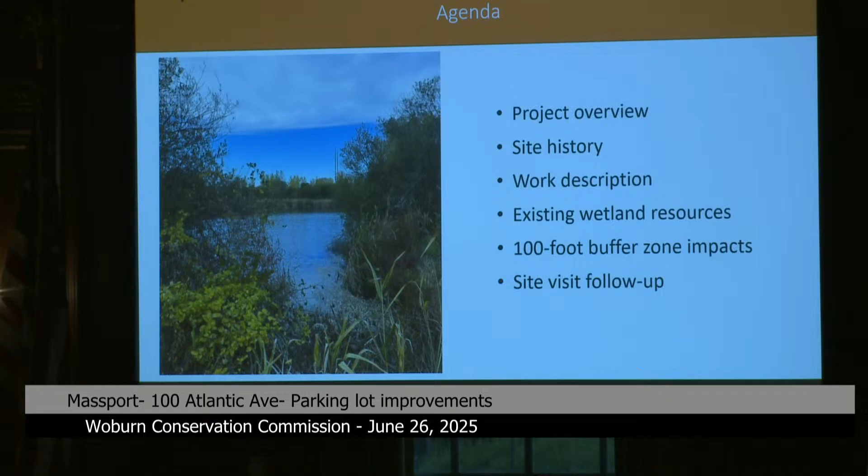Hi everyone, my name is Carly Barron. I'll give you a quick project overview, talk a little bit about the history of the site, discuss the existing wetland resources on site, the proposed 100-foot buffer zone impacts, and then we'll jump into a follow-up from our site visit last week, because I know we came out of it with some questions and requests, so we'll try to cover all of those things.

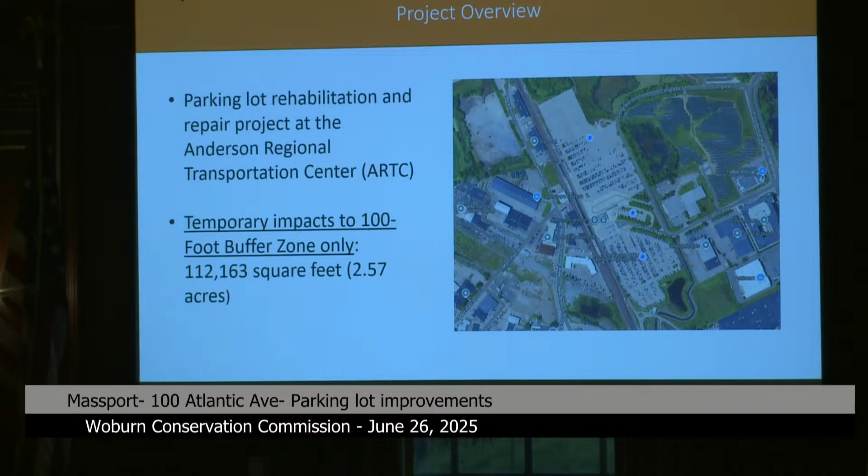So like Mary said, this is a parking lot rehabilitation and repair project at Anderson Regional Transportation Center, or the ARTC, and it is strictly temporary impacts in the 100-foot buffer zone. What I'd like to note, and I do have some hard copies here, this buffer zone impact number is different than what was included on our original application. I sent the commission an updated plan; the design hasn't changed at all, we just added a 100-foot buffer to a feature that didn't have it before, and our impacts went up just a little bit. We're looking at 2.57 acres of impact to the 100-foot buffer.

I'm sure all of you are familiar with this site, but the ARTC is built on the Industri-Plex Superfund site, which was a former chemical and glue manufacturing facility. The site was cleaned and capped with an impermeable layer to seal hazardous waste and prevent further pollution. The ARTC was built on the site in 2001 as a joint venture between Massport, the MBTA, and MassDOT. As Mary touched on, the ARTC has an agreement with the EPA to maintain this site, so this project is just part of the ARTC fulfilling that obligation.

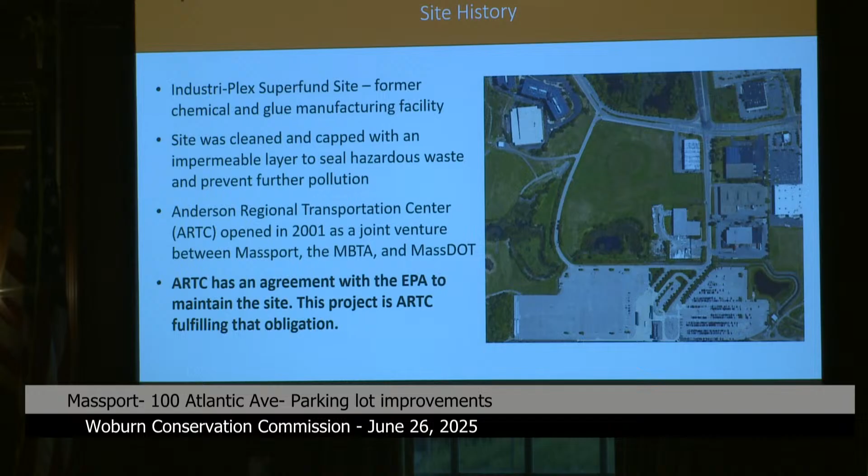To touch on the actual work proposed, we have pavement repair, so a mix of mill and overlay and full depth pavement replacement. Some drainage improvements, including replacing 2 manholes, only one of which is in the buffer zone, and replacing 4 catch basins, none of which fall in the buffer zone. And then repairing 16 catch basins - cleaning them out, concrete and brick repair, and adjusting them to the new grade of the parking lot - 5 of those fall within the buffer zone. On top of that, we have some restriping, fence repairs, and a laydown area within the existing lot. But I want to point out that everything is proposed within the existing parking lot.

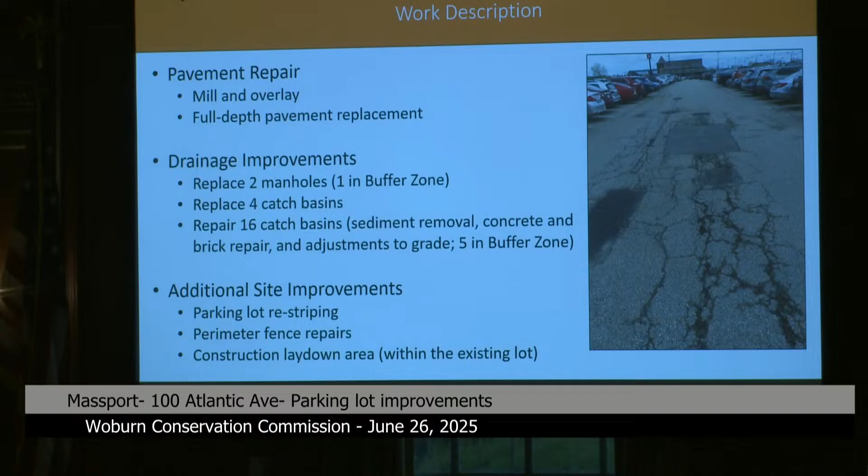We had several wetland resources delineated along the perimeter of the site, which we saw some of during our site visit. We have 4 intermittent streams - HNTB B, C, and D are up here, and they flow southeast. And then HNTB F, which is an intermittent stream man-made channel that comes all the way around to the south.

And then 2 bordering vegetated wetlands, HNTB A, and what we have determined is a wetland - that was a question at the site visit. This is HNTB E, and HNTB-G is a stormwater management system. All of these features have a 100-foot buffer, that yellow line, with the exception of HNTB-G. You'll see that most of the buffer really just hugs the perimeter of the parking lot.

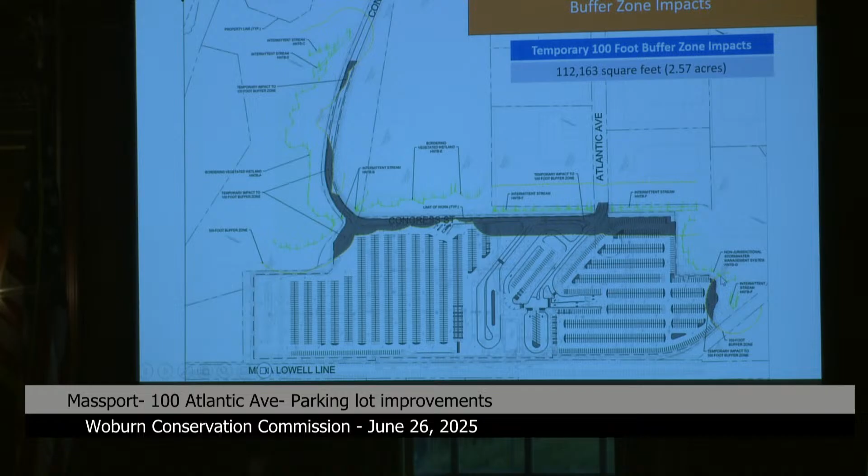So, like I said, we have 112,163 square feet, or 2.57 acres of impact. It's a little hard to see, but this is our updated plan. The green are the delineated features. The yellow is the 100-foot buffer. And the dark gray shading is the 100-foot buffer impacts. As you can see, we do not have a buffer on HNTB-G because it is non-jurisdictional.

So now we're just going to hop into some of the questions that came up at the site visit. On the left are the questions and requests, and on the right is Massport's response. I'm going to cover the wetland questions, and then I'll pass it to Jeff to talk about stormwater, which I think was the main concern.

One of the questions that came up was what type of erosion controls will we be using, and it is compost filter tubes. There's a detail on sheet 77 of the plans.

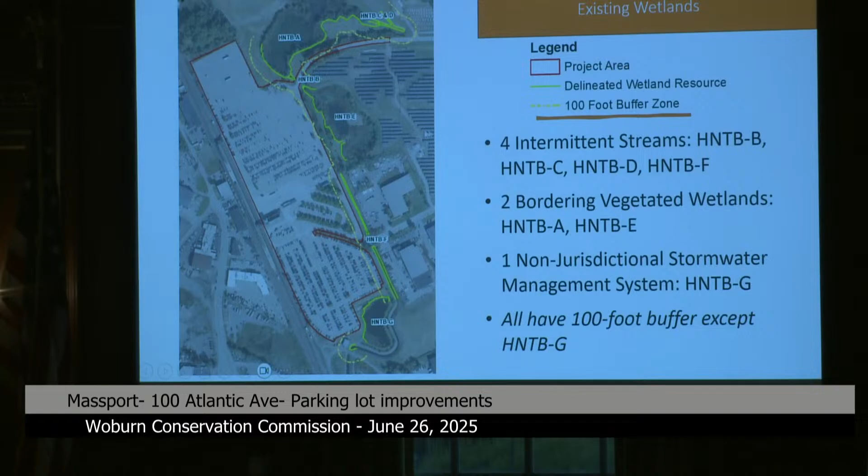The other question was to confirm that HNTB E and HNTB G, because we were initially calling them non-jurisdictional stormwater management systems, weren't wetland mitigation. It does turn out that HNTB E was actually wetland creation from the 90s or before. So we did end up calling this a jurisdictional BVW with a 100-foot buffer zone. That's that change to the plans.

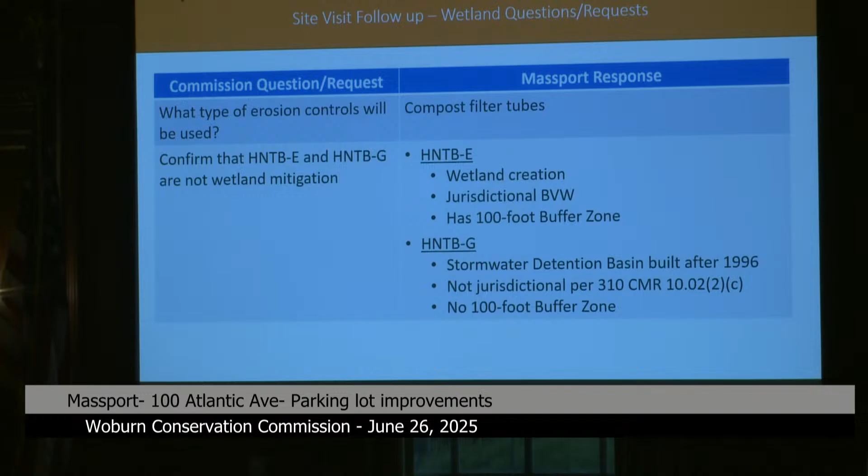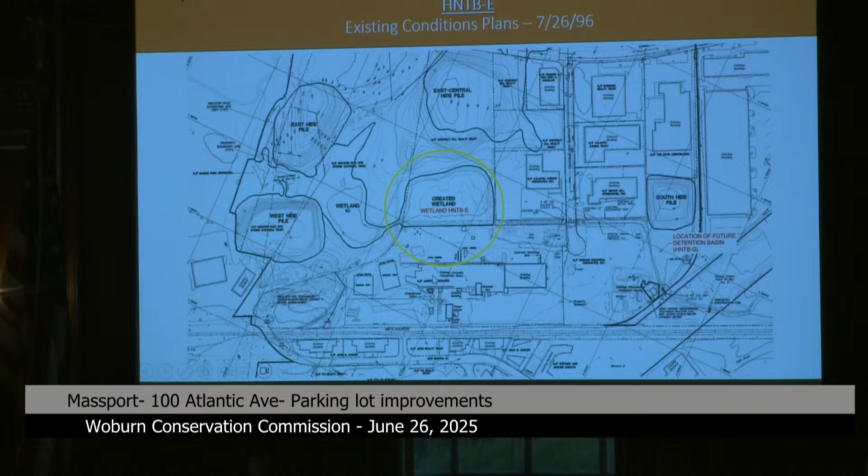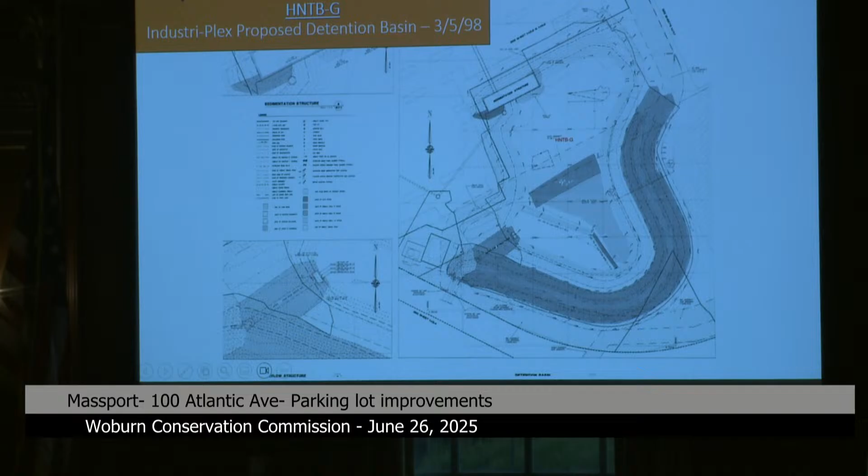And that wraps it up for the wetlands. I'll pass it over to Jeff to talk about the stormwater requests.

Thank you very much. I'm going to walk through these. We provided a graphic that I think will illustrate the drainage patterns of the site a lot more clearly, so we'll look at that next. But one of the things we discussed on site last Wednesday was the depths of the catch basin structures, whether they had deep sump basins on site. They are not deep sump basins. The site is limited by the geotextile cap for the depth that utilities and drainage was able to be installed to.

The overall site flow pattern, we discussed this quite a bit. There's a sedimentation basin on site - a sedimentation structure, which we did inspect. Overall, the site drainage flows from north to south, and all of it is combined in a 3 by 4 foot box culvert, and ultimately discharges into this sedimentation basin, which then discharges to a constructed stormwater wetland.

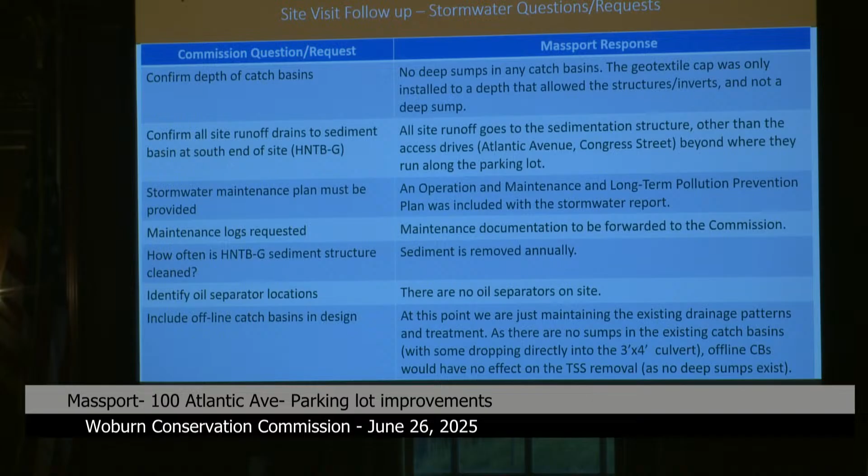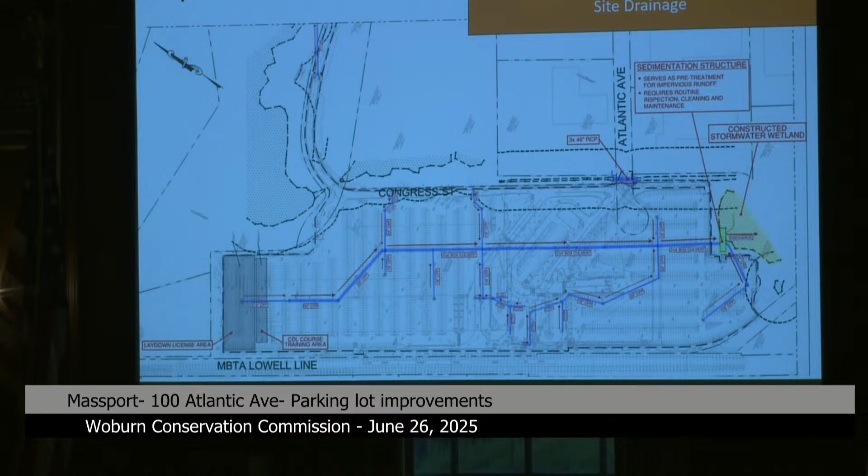That's all we have. Any questions? Is there anything? If you can leave that up, that last one?

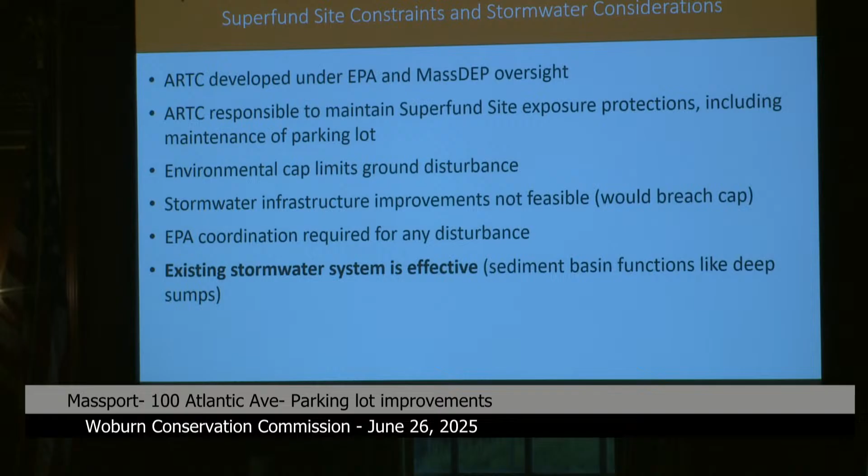There should be some way, I think, to keep the oil and gas and floatables out of that sediment basin, because once that basin fills up, as we saw when we went out there, all the top stuff - oil, gas, floatables - goes over the edge and into the constructed stormwater management system. I don't know if that stormwater management system allows water to go anywhere else from there. Obviously, we didn't get down there to check that. But I mean, it's almost implausible to me that we can't more effectively manage the stormwater out there.

Do we know what depth you can go to out there? Do you have anything? It varies. We have record drawings to illustrate it, but it's a few feet down, I can't recall exactly. It varies with the site. It's just shallow enough to allow for the utility layout, drainage layout.

But as you saw, the catch basin structures are all shallow, drop inlet type structures that are laid out. And there would be absolutely no place on that site, even where the sediment basin is, where you could put some sort of water quality unit. That basin is pretty deep - it's probably 10 feet, I don't know.

Is that anything that was looked into, I guess? Well, the sedimentation structure does provide TSS removal in terms of water quality, but you're referring more to the pollutants. Yeah, okay.

What I was going to say is, you mentioned we have maintenance records. It didn't appear as though that basin had been cleaned for quite some time. Do we know exactly when the last cleaning was? It looked like there was a lot of sediment in there. I think there were actually some plants growing out of it.